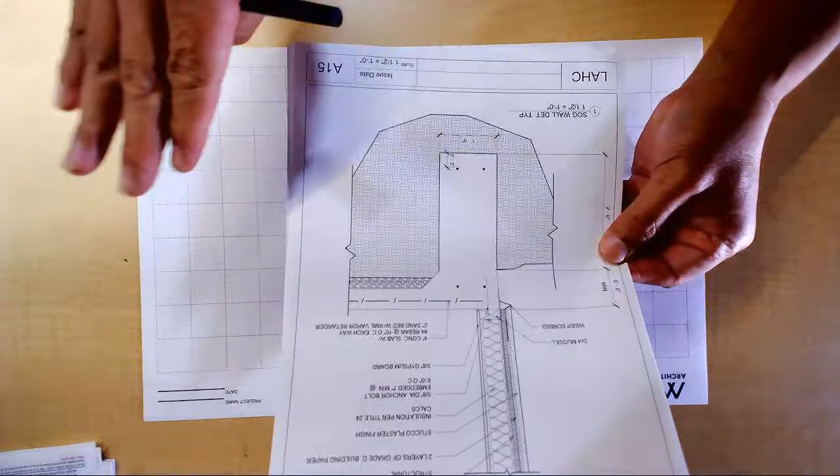Hey guys, so we are going to freehand draw our first architectural detail. These are details that you will see in the professional world. So we're going to obviously draw it by hand. You guys should see a handout. We're going to draw a footing detail, and I recognize that you guys might not even know what you are looking at, but this is a technical drawing of a footing or a foundation system.

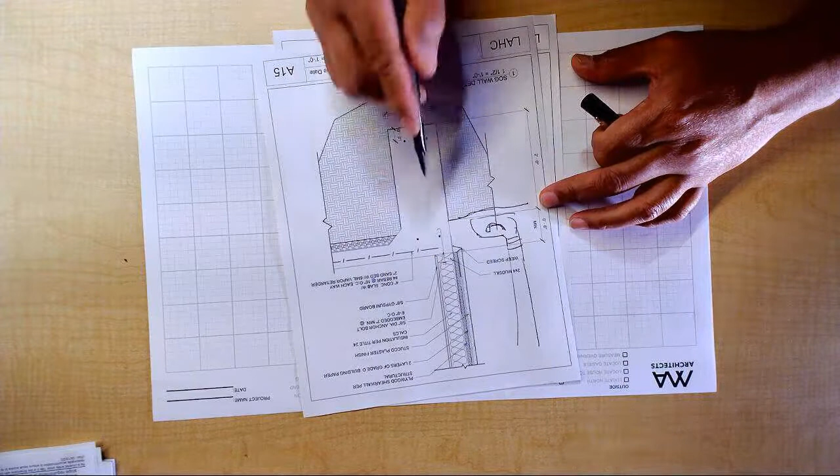So let me see here. If you were standing outside, your legs would be somewhere here, and your Nike would be somewhere here, you know, standing on dirt. So this is your dirt line right here. And then if there was a door, you would see a door, but in this case, you're seeing a solid wall.

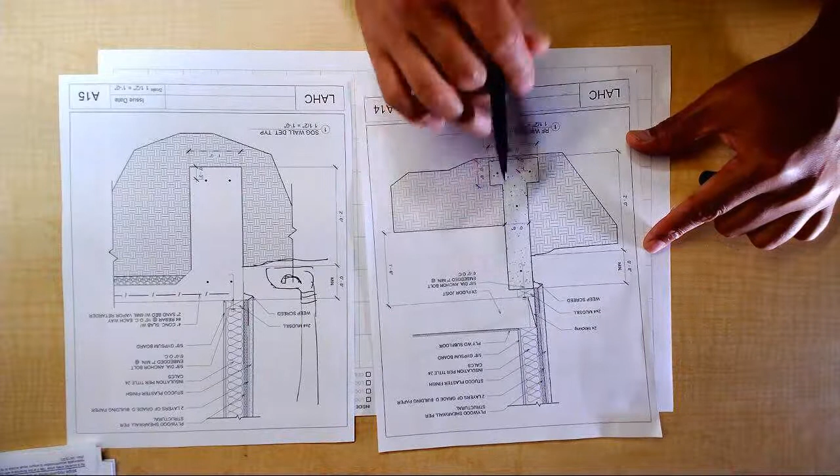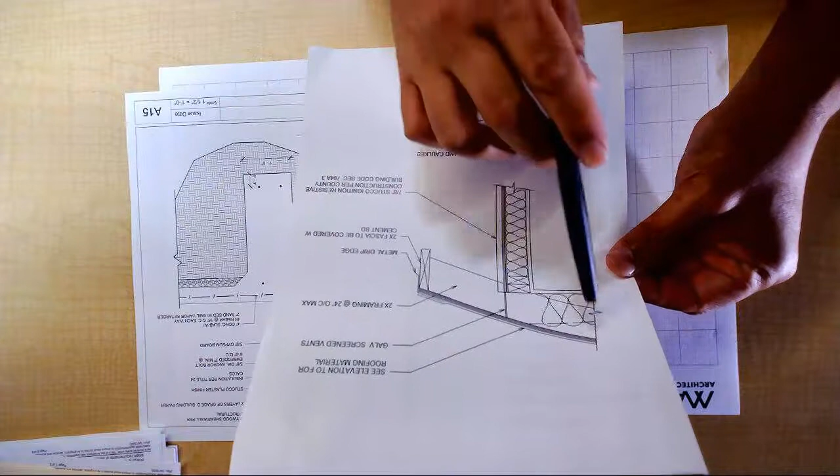And then mostly in houses, there's two types of footing. One is called the slab-on-grade, where the concrete is sitting right on the dirt. And the other is called a raised floor, where you have your foundation and then you dig out some dirt so people can go underneath the house and service things like plumbing lines in the future. And then the third detail that you guys are going to draw is kind of an eave detail, which is at the top of the roof, what the roof looks like and the overhang of the roof, right?

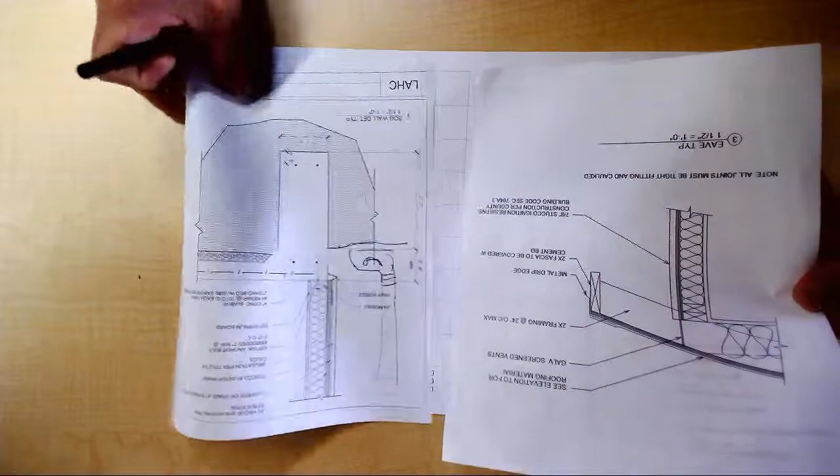And frankly, it's okay if you don't quite understand what you're looking at, because I remember when I was taking architecture courses when I was younger, I was asked to do a ton of these drawings, and I had no idea what I was drawing. I just drew them and made them look like the handouts. But eventually I figured it out. So I imagine it might be very similar for you guys. So right now, I don't mind if you guys don't fully understand everything that's on this sheet. The purpose of this exercise is just to still measure and kind of draw freehand. So do the best you can.

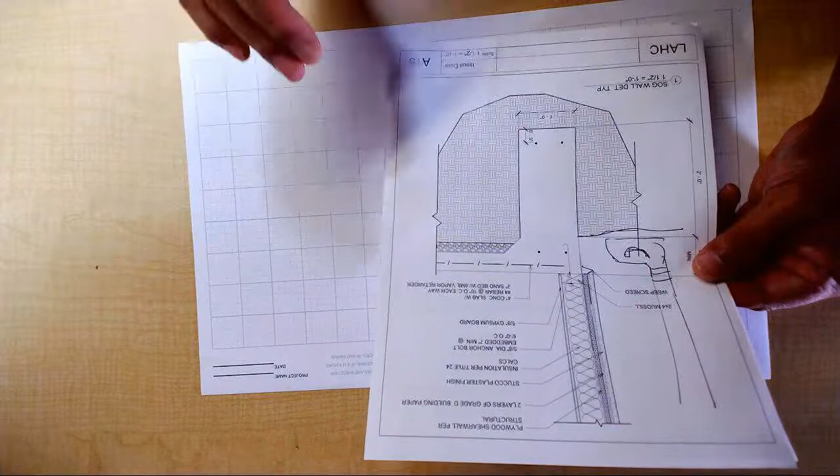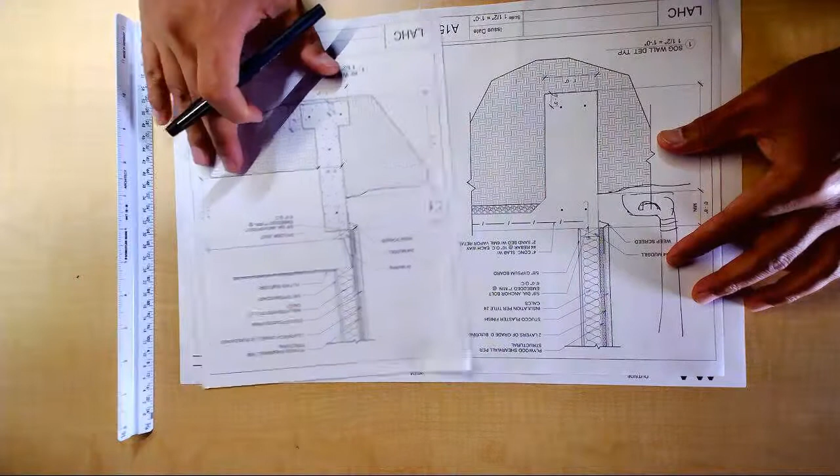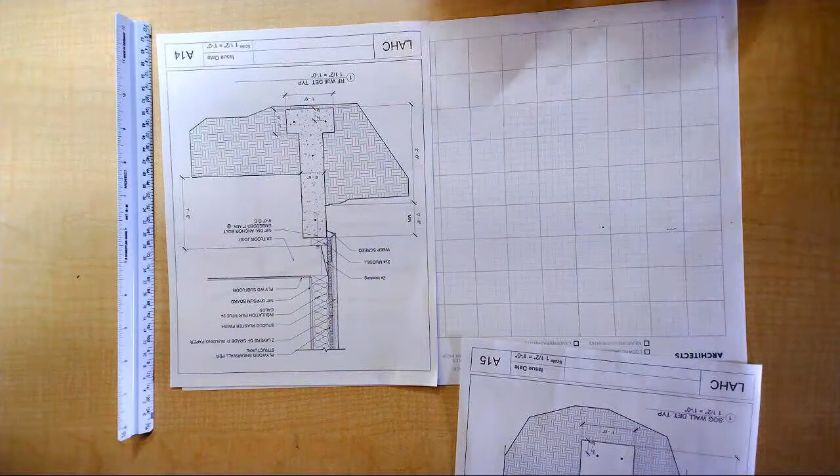The important thing is that we're going to draw this where all of our measurements are going to be 1.5 inch scale equals a foot. So you guys are going to need your architectural scale. And if you have your 11 by 17 piece of paper, this is about the scale. So you're going to do a drawing somewhere about here, and the next one somewhere here. So I think I'm going to start at maybe this point. And then I'm kind of measuring here. If I track this line down, I think I'm going to start somewhere about right here. Okay? So that point will represent that point.

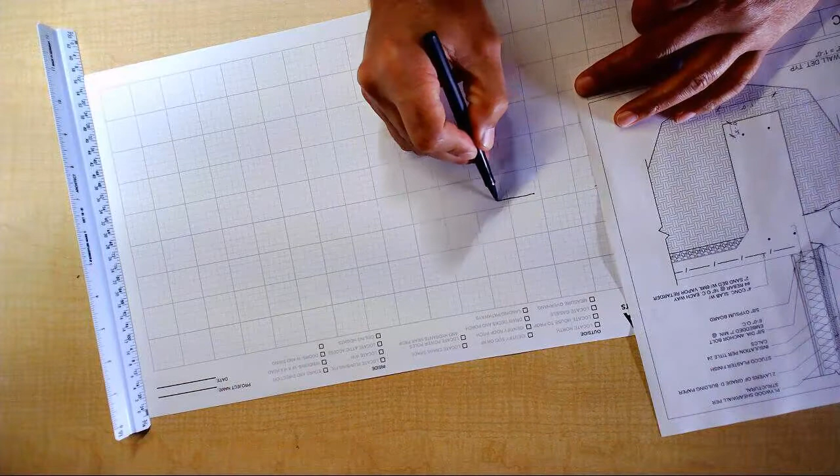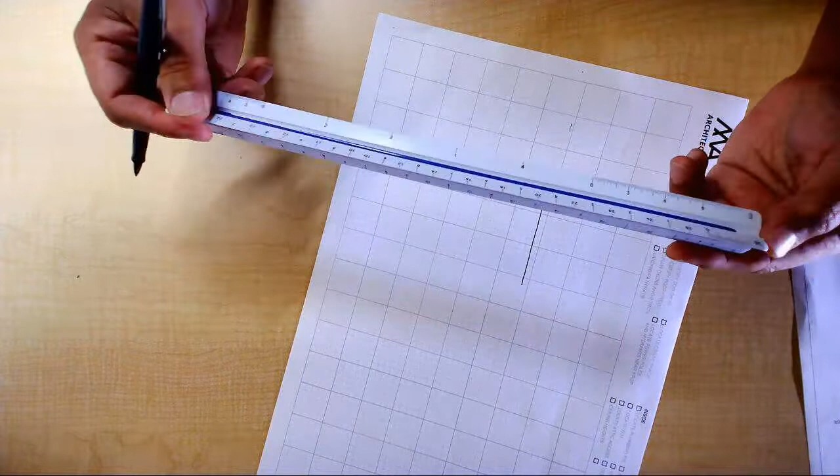So I'm going to first draw the floor basically inside the house, and then on top of this line you will put your carpet or your wood floor, things like that. So I'm just going to go ahead and draw a line, and then we want to come down using this distance, right? We want to come down a total of 8 inches and then another 2 feet, so 2 feet 8. So here's my 1.5 inch scale. I'm reading the 0 at the top, which is a smaller 0. So here's the smaller 2. So from here to here is 2 feet. So I'm going to come down here. 8 is like right there.

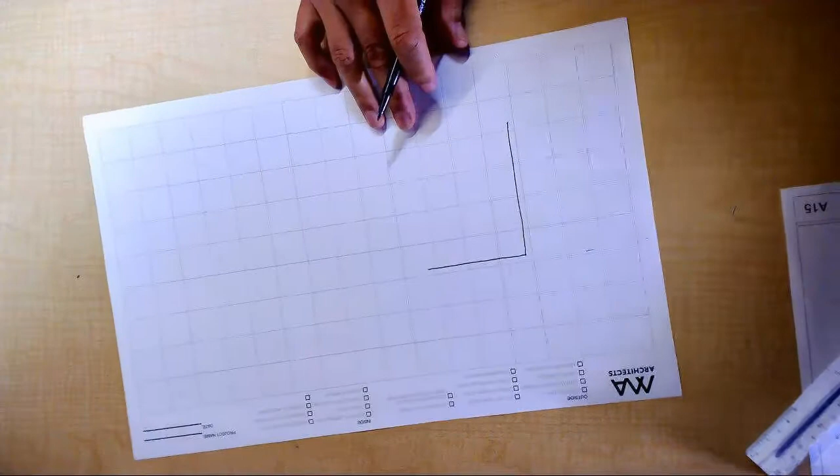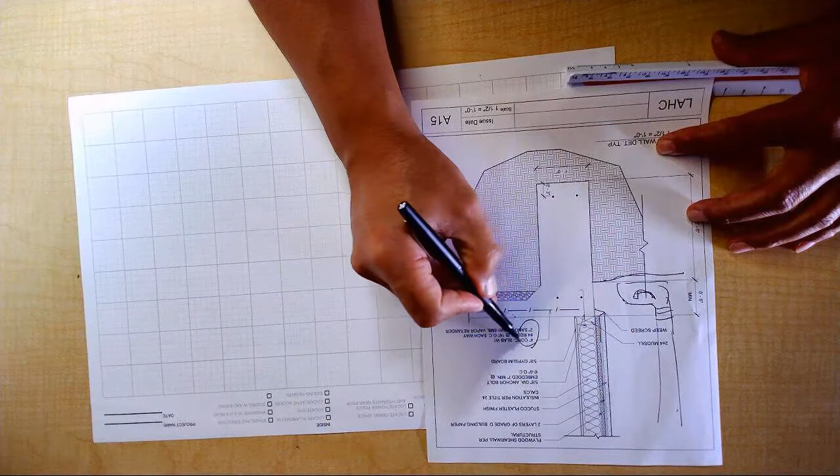I'm going to go completely freehand on this one. I'm not even going to use a ruler. And the bottom of the footing is 1 foot. So here to here. This slab, if you look at the thickness of this concrete, you'll see it in this reading here. It's 4 inches thick. So it's 4-inch concrete slab with number 4 rebar, 16 inches on center each way, with the sand barrier, blah, blah, blah. That's all really technical, and I don't want to get into describing what that is, at least in this video. So I'm just going to draw it, and I just want you to make it look similar to that. So I got 4 inches coming down.

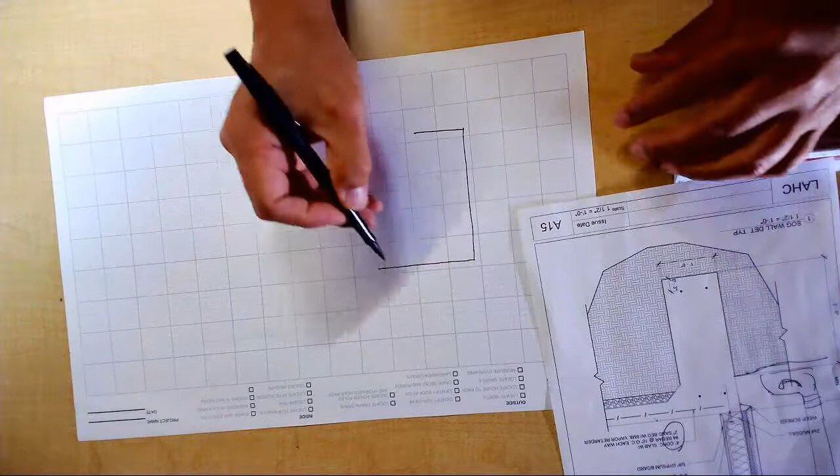Just that line. And then, so somewhere here.

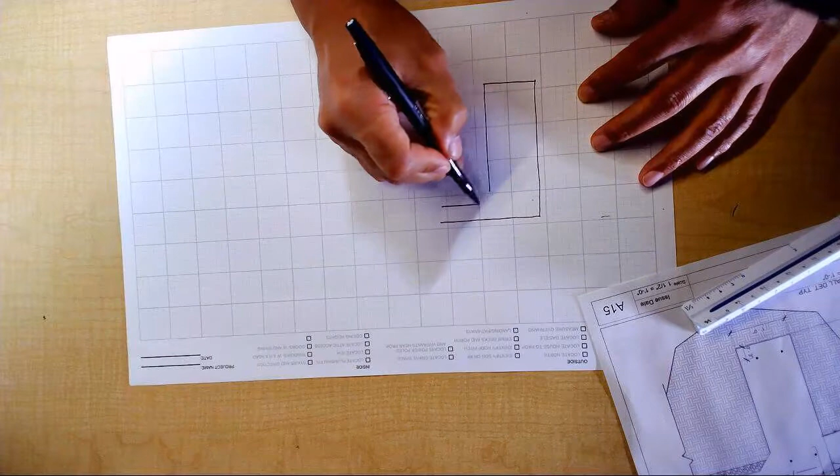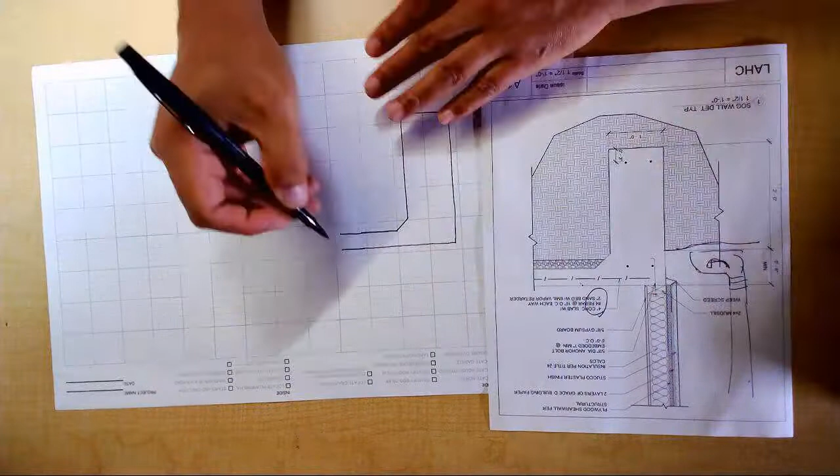4-inch line is somewhere here. And then I'm going to just stop a little short so that I can just put this little 45. So I'm almost there. I guess I can make this line a little bit longer. And this is called a break line, meaning this house obviously is much wider, but we don't need to draw it because we're really talking about this area here. So I'm just going to go ahead and draw a break line, and that's what a break line looks like.

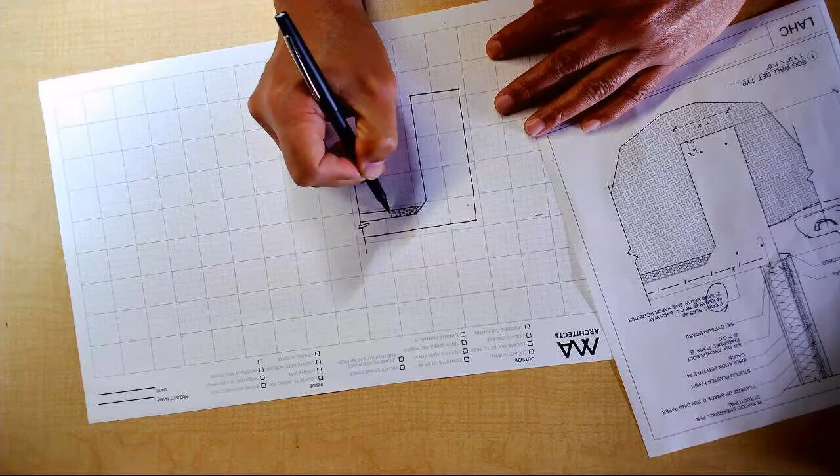And then I have 2-inch sand bed, which is right in here. So I'm going to measure 2 inches somewhere here. And I'm going to do that, and then just draw a bunch of little circles that represents sand. And the rest of it is all dirt. So the natural dirt, or we call them grade, for another technical term, grade or dirt.

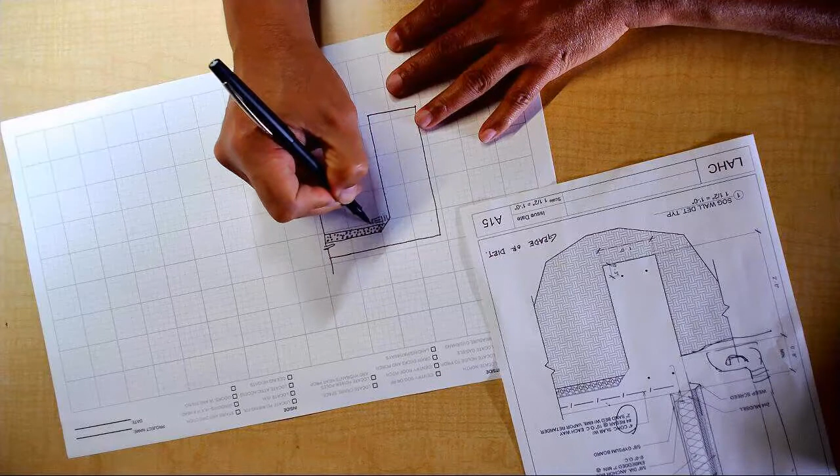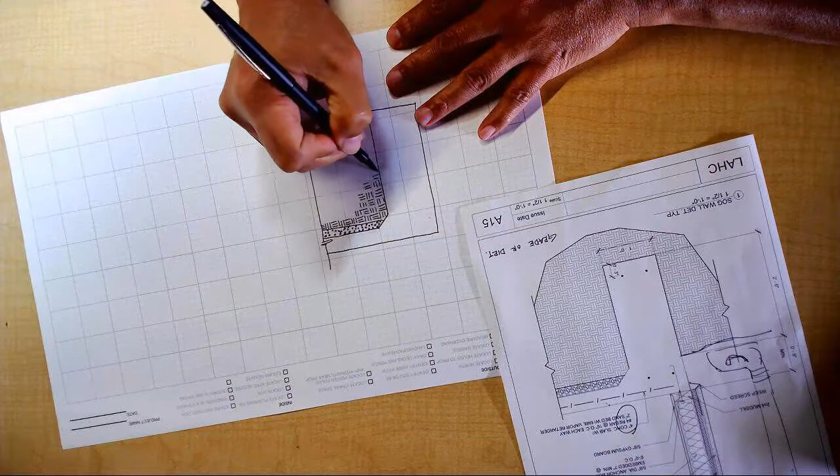Right? So that one is like a tic-tac-toe almost. So you're going to draw 3 vertical lines, 3 horizontal lines, 3 vertical lines, and you're just going to alternate freehand. And you don't have to fill all this out. I just kind of feather it out so they understand that the dirt will continue. Something like that, and I might put some down here. Just to say there's dirt around here too.

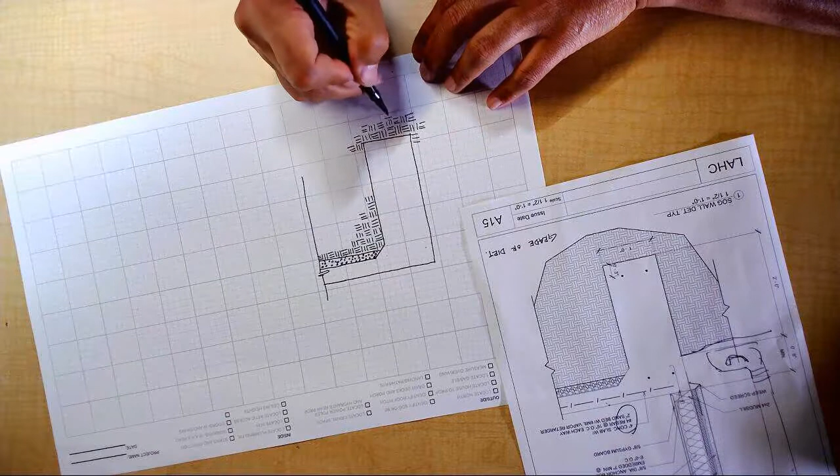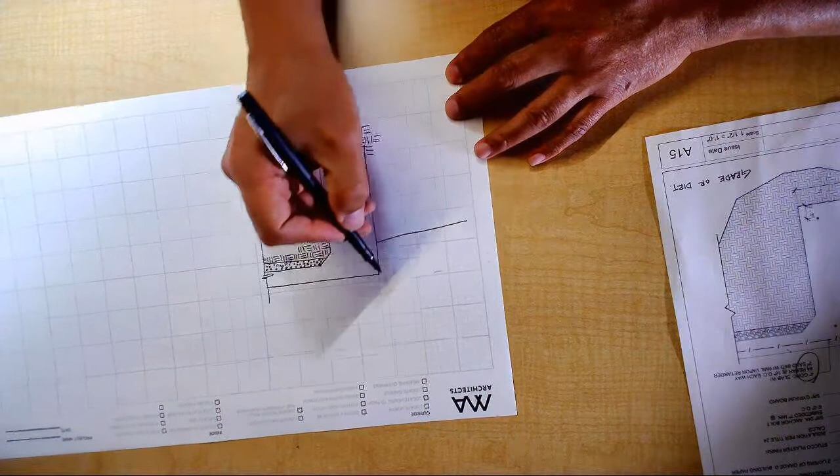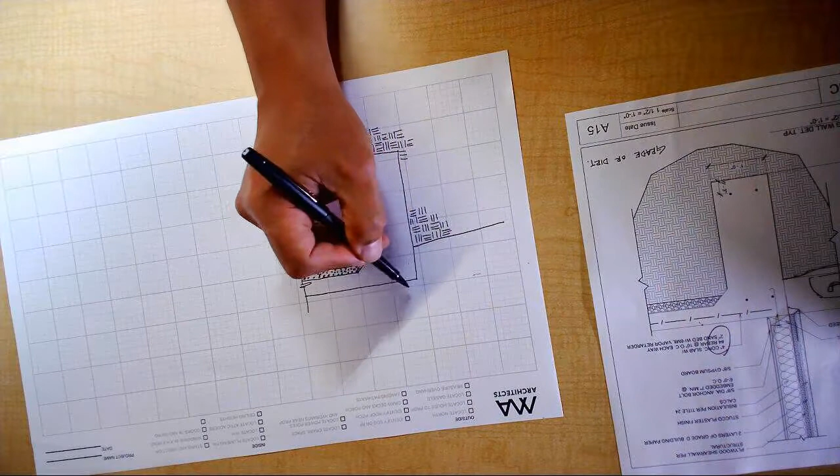And so from this line here, you're going to come down 8 inches, and that's a building code thing where they want the dirt to be no less than 8 inches, like that. And then I'm just going to kind of draw a line angle, so that way when it rains, the water drips away. And so this will be my new dirt line. Like that. And then again, this is so that when you got rainwater, the rainwater doesn't hit the wood and rot the wood. So they want at least 8 inches separation.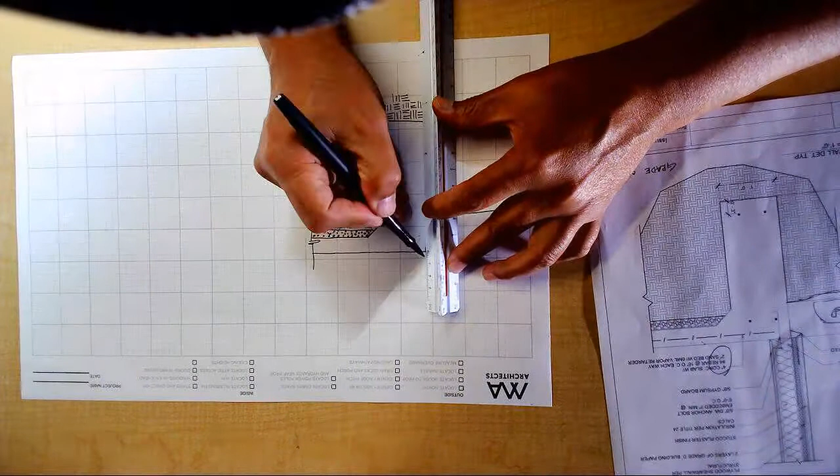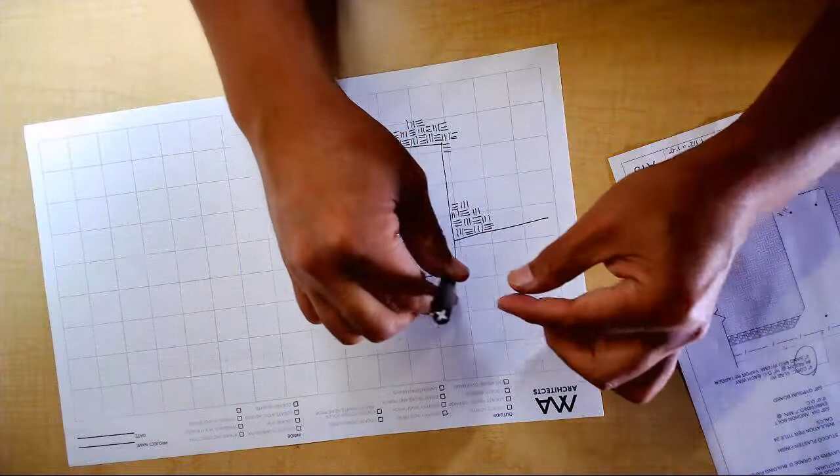Now you're going to draw this little thing with a little square box with an X on it. That represents a 2x4 on the ground. And 2x4 is 1.5 inches tall. So you're going to go 1.5 inches right there. And then 3.5. Right there. So this represents a piece of wood that's sitting on the ground. But this piece of wood is a long piece of wood. So basically it's coming towards you. So when this piece of wood is long, you're going to put an X by it, like this, saying that piece is a long piece of wood.

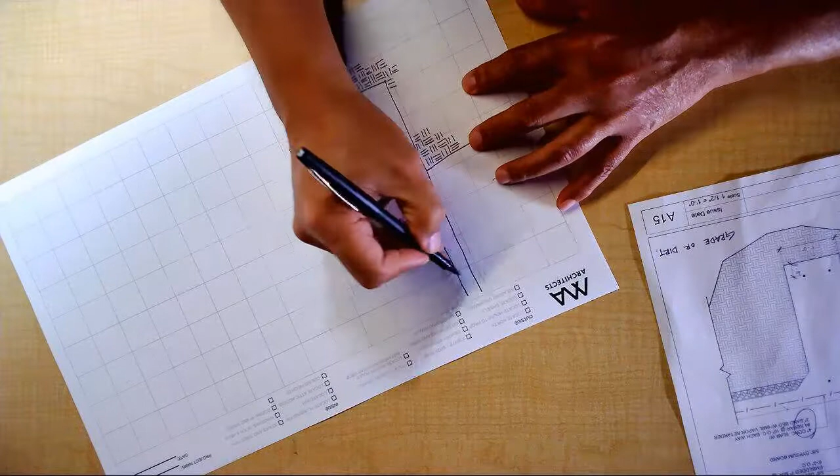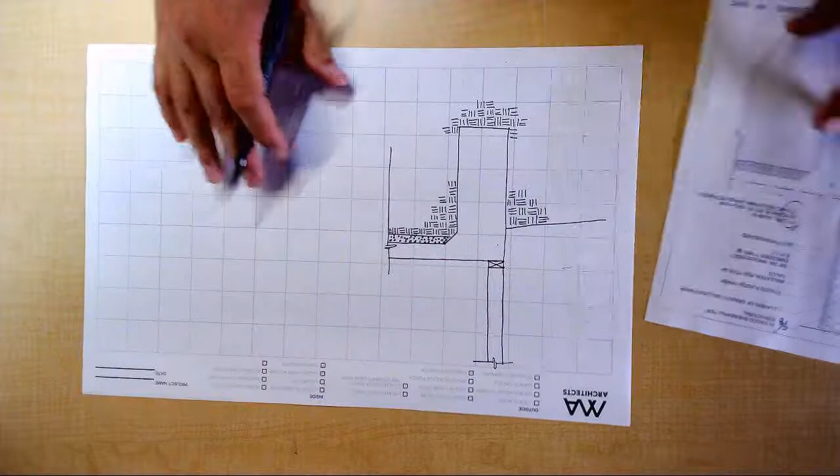And then after that, you get your 2x4 that's sitting on top of that. And that represents your framing for the wall. So you have kind of like the skeleton, and then usually on the outside of the 2x4, you'll get a plywood, and that plywood is represented here. And I should actually give you a size. Typically, the plywood is 5/8 of an inch. Okay, so we're going to measure roughly. Getting 5/8 of an inch is not easy, so you're going to be pretty close. So it's going to be somewhere there, and that plywood usually goes all the way to the wood.

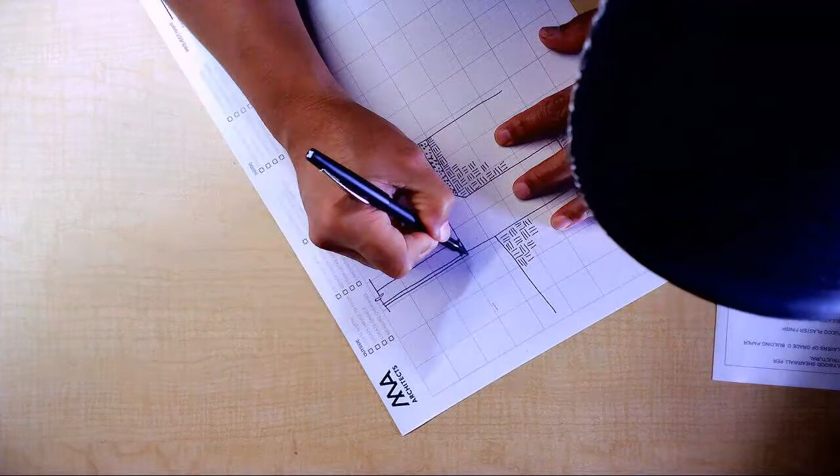So, and I know on my handout the plywood hatch is a little bit different because it's computer, so we can keep it a little bit fancy. But traditionally, the plywood symbol is just multiple lines with like 45 degrees in between them. So that's what represents plywood in a traditional hand-drafted sense.

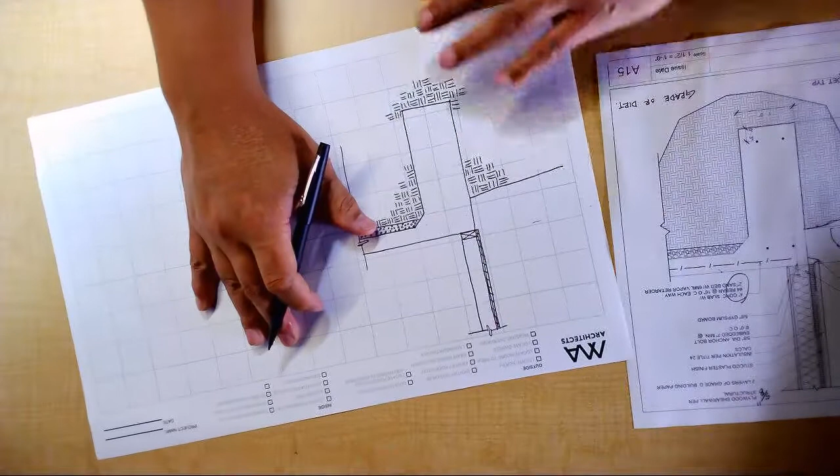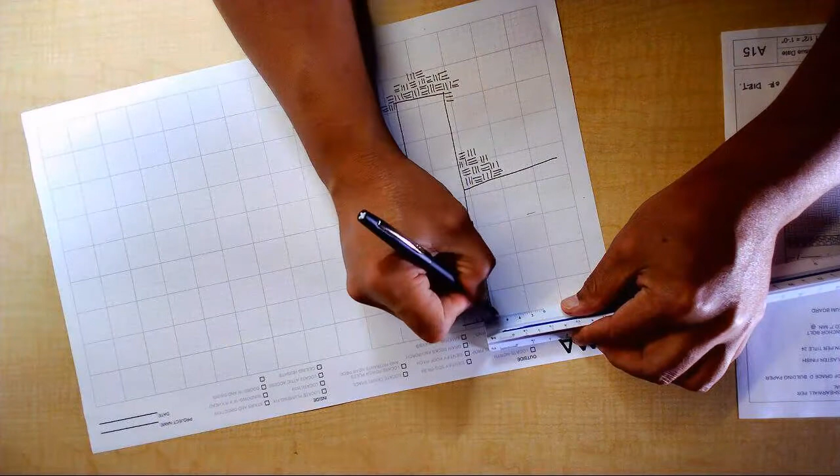And then on top of the plywood, you're going to put your stucco, right? The stucco finish is usually about 7/8 of an inch, or 1 inch would be okay. Alright, so we're going to just measure out roughly about 1 inch, about like that, and then we're just going to kind of wiggle it out, just kind of freehand, but we're going to give it a slight stucco texture. And usually the stucco finishes on a piece of metal trim, so we're going to draw what we call a weep screed. It's just a dark line with a little 45 degree.

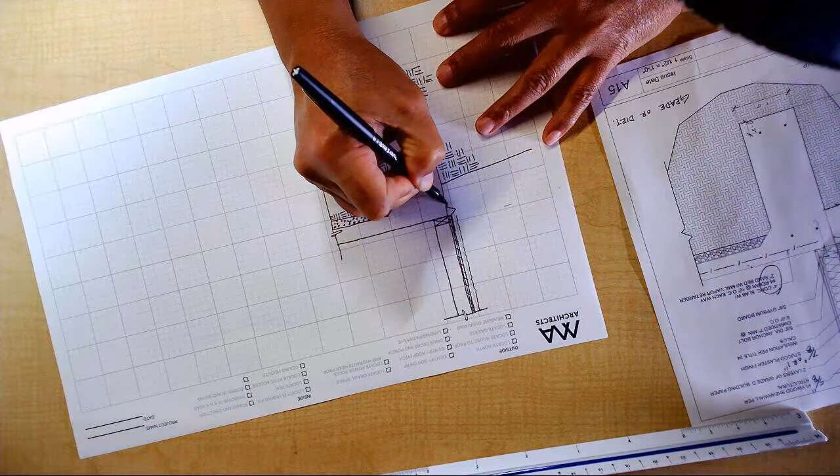45-degree. Goes right onto that. And stucco, you're going to put a little dotted line on it to represent kind of the sand, the stucco. So we're pretty close on that detail. We're almost there. And then let me see.

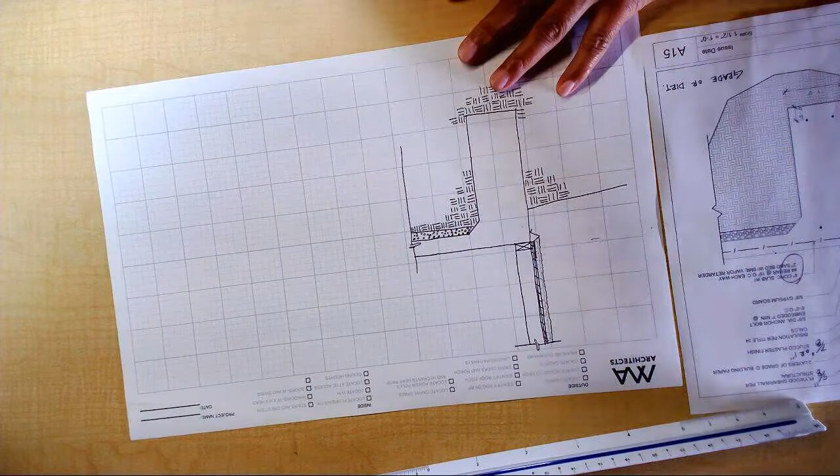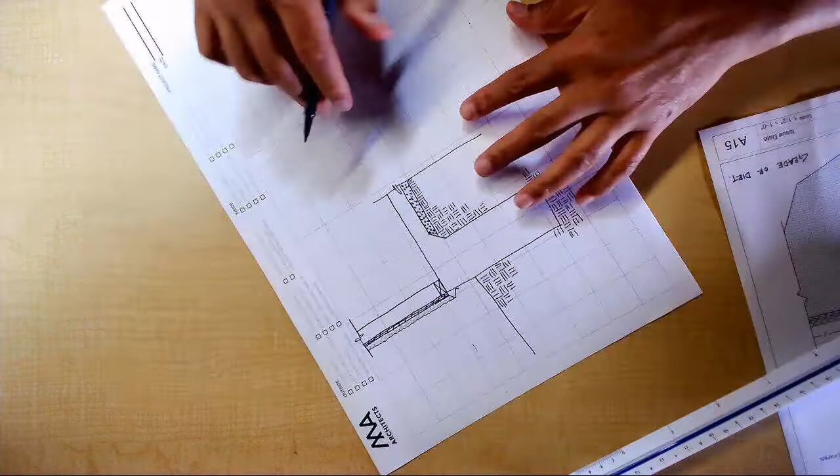Oh, and then the drywall on the other side. So drywall, which is this guy here, is 5/8 of an inch. And then again on the diagram, it's showing double lines and stuff like that. Our computer software does that automatically. You guys don't have to do that. You guys just have to draw something that's roughly 5/8 of an inch and show drywall. So that's the drywall. And you don't have to show the finish of the flooring at this moment.

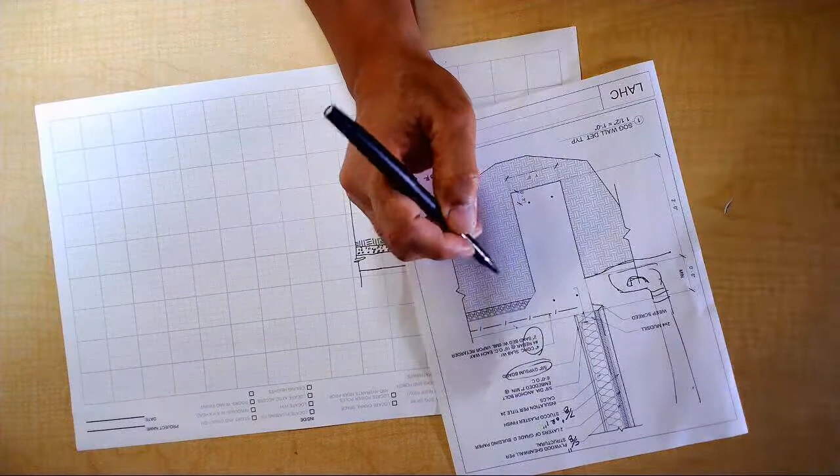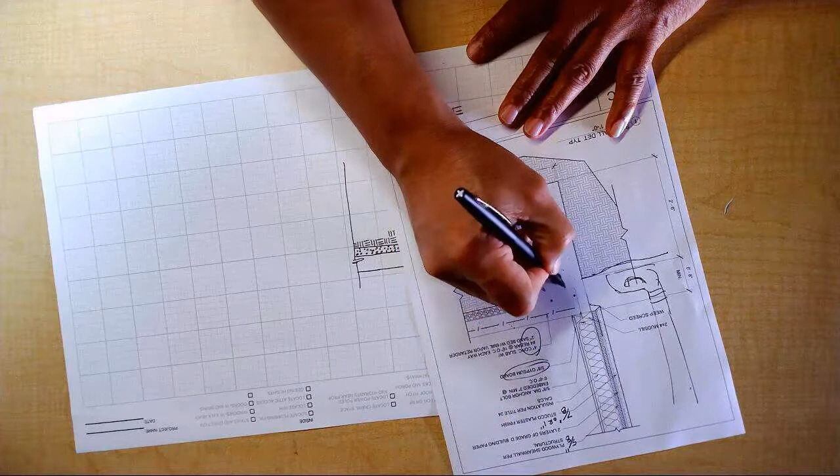So, I noticed that what's missing here is really the texture for the concrete. So the traditional texture when you cut and then you're seeing kind of like the middle of the concrete, there's a bunch of dots because concrete is made up of Portland cement, a little bit of sand and rocks. So these little dots represent sand. So just kind of randomly place these dots and then put little triangles. And these triangles represent rocks or gravel. All right. So that's important.

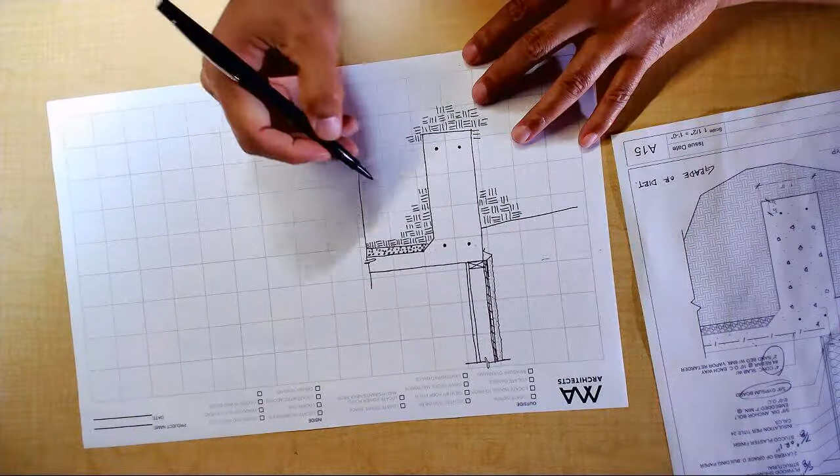So we're gonna kind of draw two dark circles, which represent metal bars that's inside the concrete, like that. And then you're gonna do kind of random dots and triangles for the concrete, for the gravel rocks.

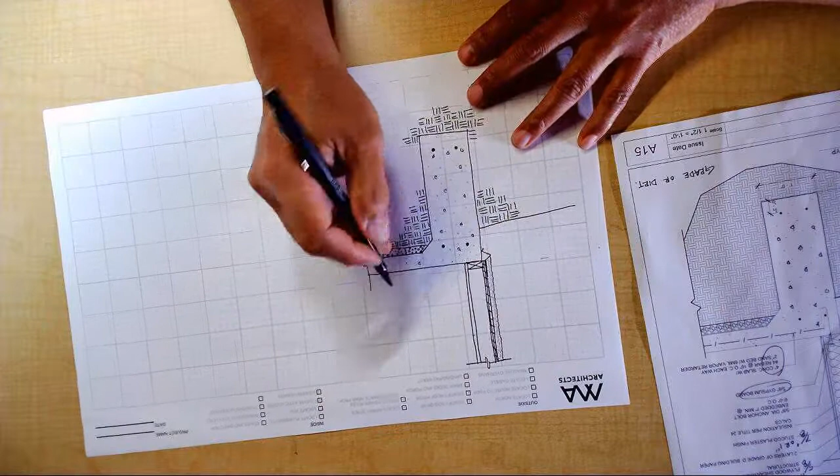So once you have kind of something graphically like that, we're going to draw in the metal that goes onto the slab here, which is kind of this symbol here. So you're just going to draw some horizontal lines, dashed lines, horizontal. And I'll kind of describe to you later on what these things represent during like building materials and things like that.

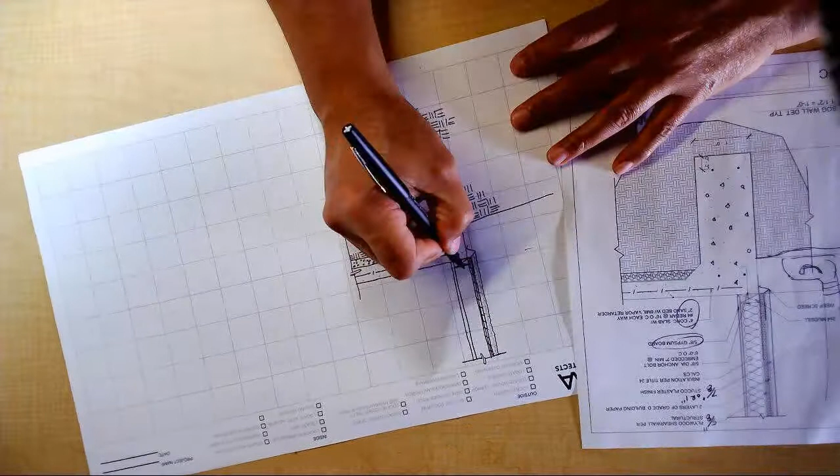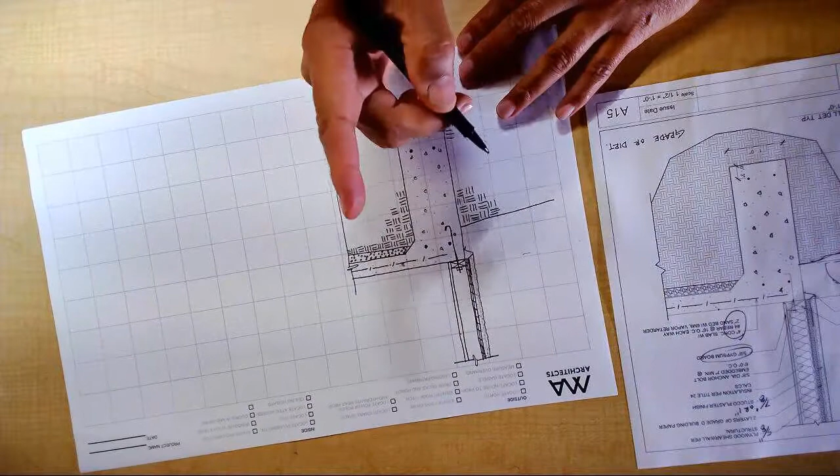And then here we have a little bolt. And then for the bolt that's inside, that's holding this wall down, we just draw a line. And it's usually like a shape of a J. So just a thick line should be more than enough for that. So, okay. So in terms of drawing, we're pretty much all there. Now we're going to do architectural writing. So you guys are going to call stuff out.

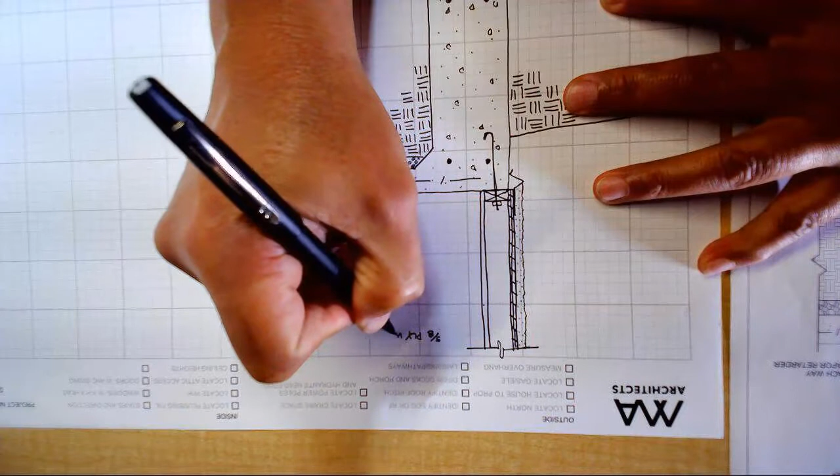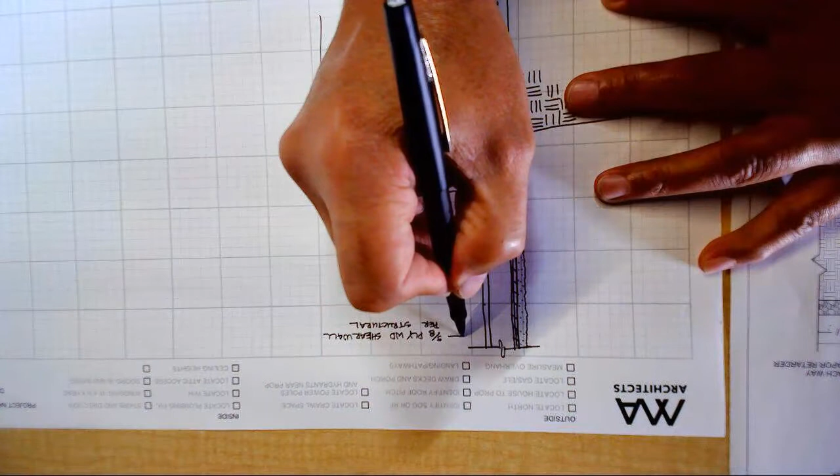So I'm going to zoom in a little bit more on this drawing. So you're going to write 5/8 plywood shear wall per... And then when you draw arrows, you always want to go horizontal landing first, and then you want to go and point at the item.

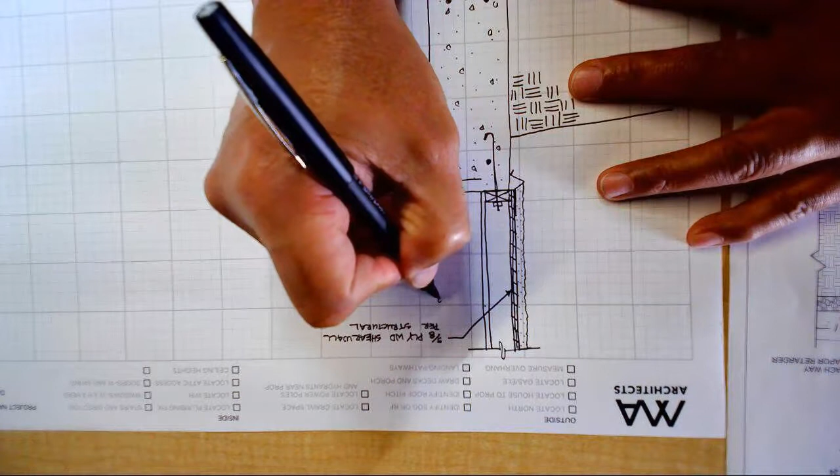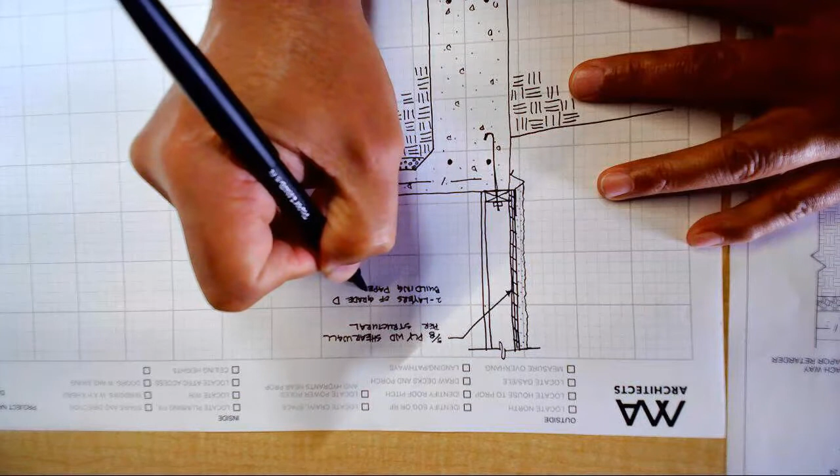So that's really important. And on top of the plywood, there's usually waterproof paper, and then they put the stucco on. Obviously, paper is super thin. We don't even bother drawing it, but we do call it out. So we're going to say 2 layers of grade D building paper, and it's on the outside of the plywood, right?

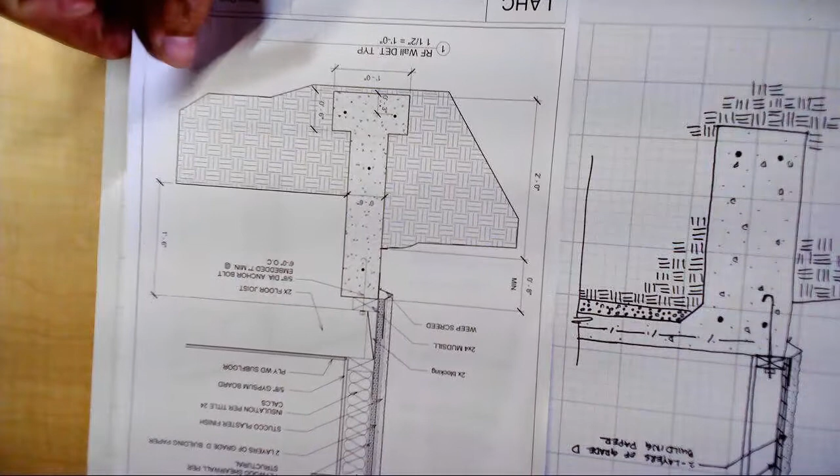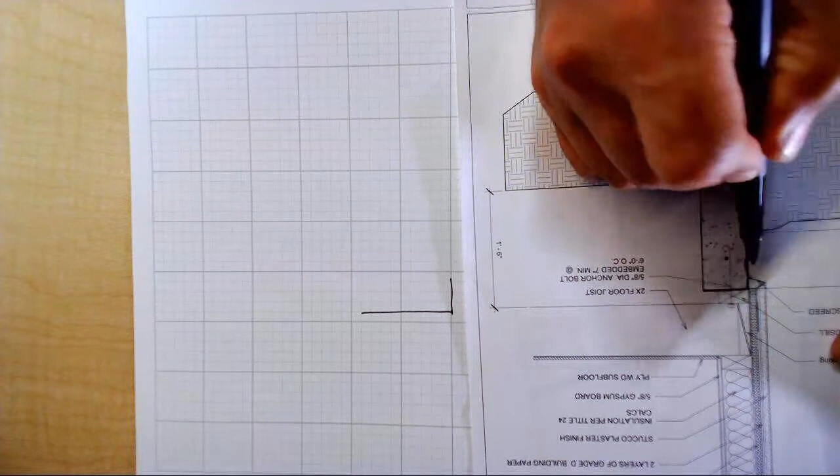And then you're gonna do all the call outs, and please make the notes match the handouts, and we're good. And then go ahead and draw the next detail next to it like this, right? You have to be mindful that you can probably use the same line to start. So this line here can represent this line. So I drew this line too long, but it should be somewhere here. So I want you guys to measure it out, but you guys can probably keep that same line like that.

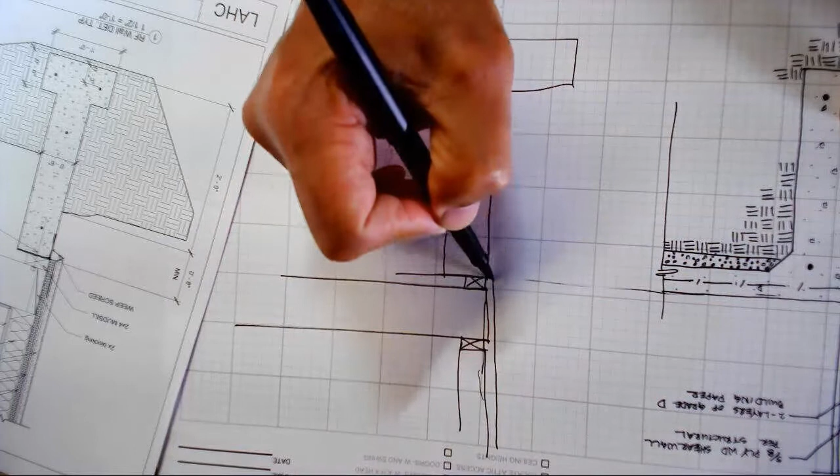And then here you guys are going to put your 2x, and then you're going to put your floor joist. Right, and then everything else repeats itself. Bottom of the wall, joist, plywood, the little 45-degree angle, and then your stucco. Okay, so there you go. I'm going to zoom this back out here. And so you will do these two details, and then you'll also, on another sheet, give me a roof detail. And we'll see you guys next time.